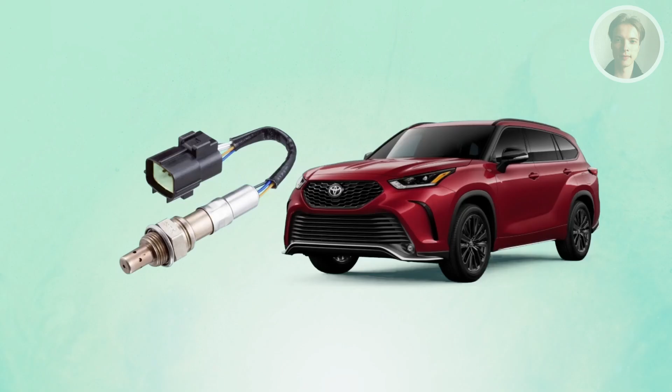So, you're looking for a way to replace your oxygen sensor on your Toyota Highlander? Well, there are a few things that you may want to do here.

First things first, you want to get ready and stay safe here. Park your Highlander on level ground and let the engine cool down, since the O2 sensors can get extremely hot. Then disconnect the battery, including the negative terminal, to avoid electrical shorts.

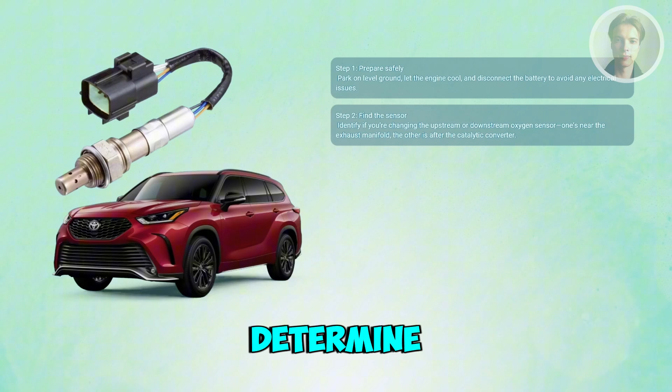Next, you want to locate the faulty sensor. Determine whether you're replacing the upstream sensor, usually before the catalytic converter, or the downstream sensor, after the converter. The upstream sensor is usually mounted on the exhaust manifold or header, while the downstream ones are further down the exhaust line. Use your vehicle's year and engine layout as a guide.

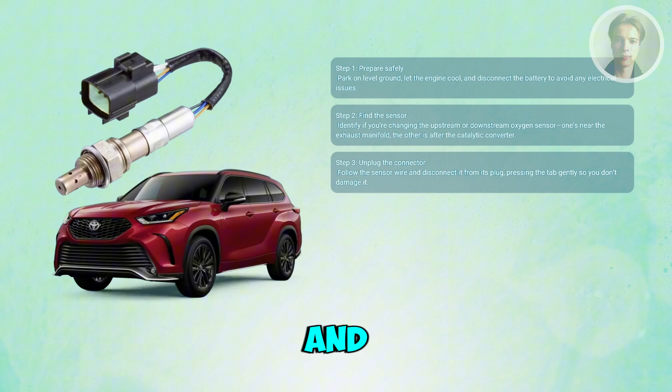Next, you want to disconnect the wiring harness. Trace the sensor's wires to its connector and unplug it. This often involves pressing a tab and gently pulling the two halves apart. Be careful not to damage the wiring here, since you still need it later on.

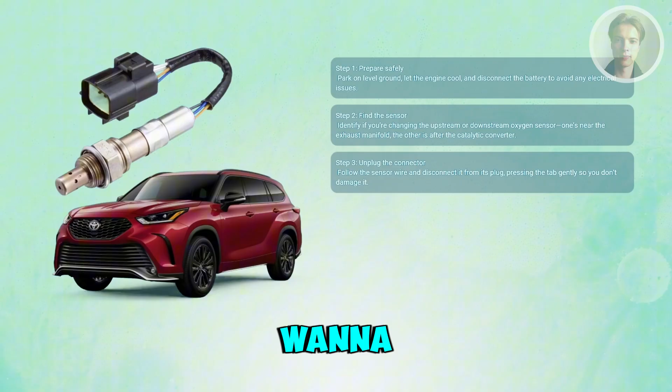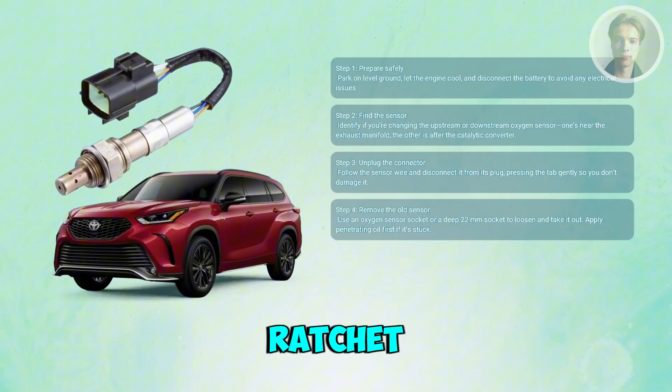From then on, you want to remove the old sensor. Using an O2 sensor socket, or a deep 22 millimeter socket in many Toyota models, and a ratchet, unscrew the sensor from the exhaust pipe or manifold. If it's seized, applying penetrating oil and waiting for a bit actually helps.

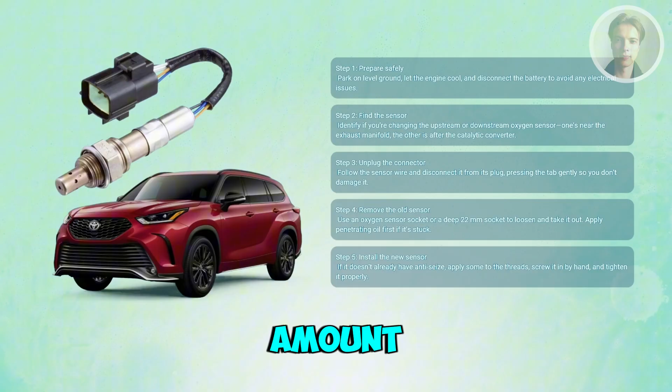Also, check if the new sensor has anti-seize compound on its threads. If not, apply a small amount. Carefully thread it in by hand at first to avoid cross-threading, then tighten to spec using the sensor socket.

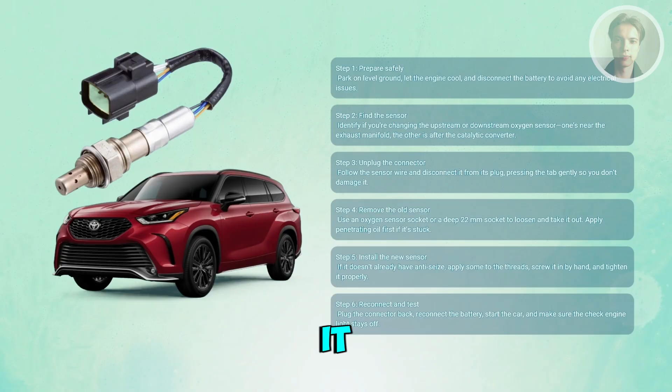From then on, you just want to reconnect the wiring and start using or testing it. Plug the connector back in, secure any wiring to stay clear of heat or moving parts, and reconnect the battery. Then start the engine, let it idle for a while, and ensure no engine codes or warning lights appear.